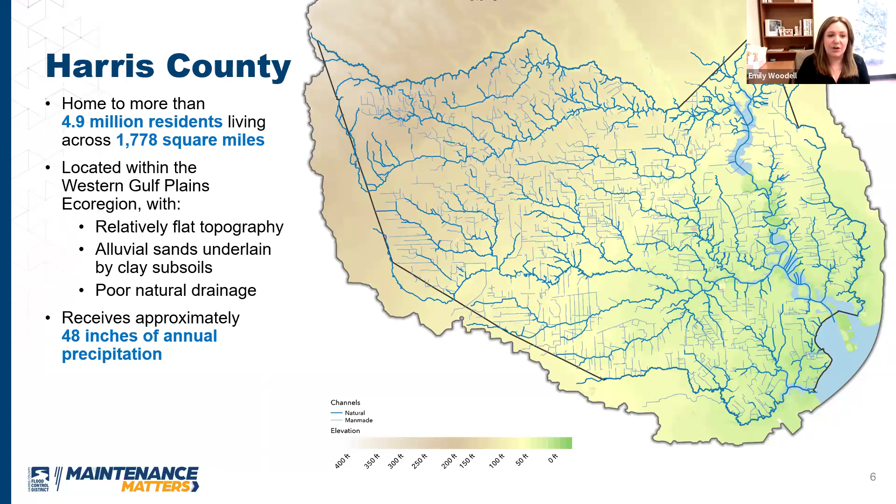Because of those issues, and in response to major flood events in the 20s and the 30s, the Harris County Flood Control District was established back in 1937. We are a special purpose district created by the Texas legislature, and Harris County Commissioners Court serves as our board of directors. We work really closely with partners at the federal, state, and local levels to advance our work across the region.

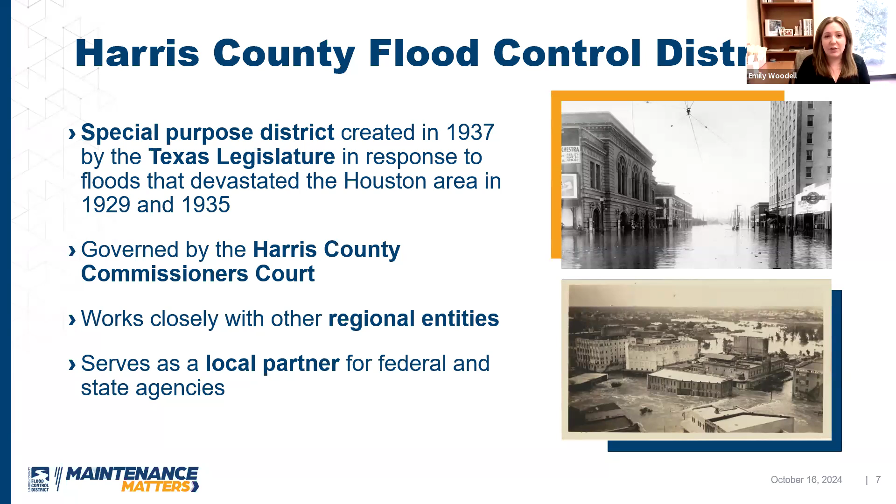Now, the Flood Control District is the only local entity with the sole focus of countywide flood risk reduction. Our mission is to plan and deliver effective flood risk reduction projects that are guided by community and natural values, all while maintaining our infrastructure.

We're unique regionally and even nationally because our scope includes both capital work, where we plan and implement projects to add capacity to our network, and maintenance, where we focus on ensuring our network is functioning as intended. There are a lot of entities that have responsibility for one or for the other, but the Flood Control District was designed to do it all, and that's really where our work sits.

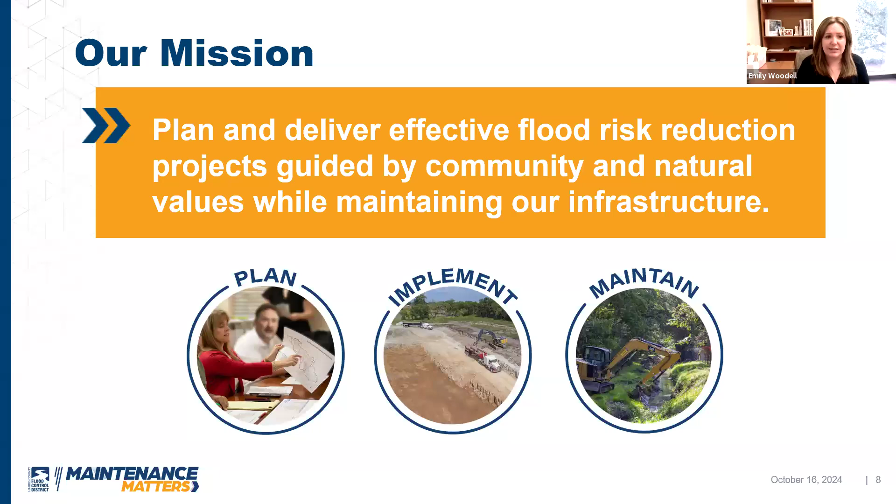We're the only entity in our region with the sole purpose of countywide flood risk reduction, but other organizations play a really important role in that overall picture. When rain falls on your roof, it flows through several jurisdictions, such as streets and drains maintained by the Harris County Engineering Department, a municipal utility district, or a city like the city of Houston, before it flows into a larger channel, creek, or bayou that the Flood Control District owns and maintains.

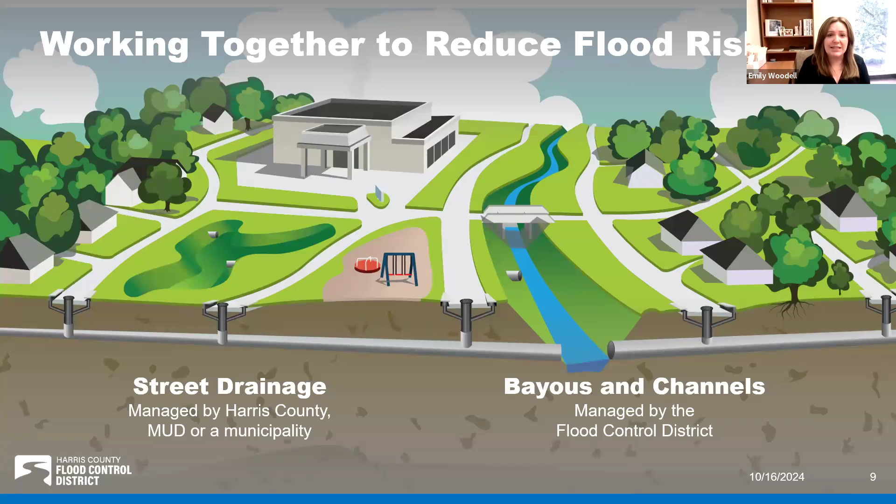Often we partner with Harris County precincts, utility districts, and other partners to add recreational amenities such as trails to our infrastructure network. That includes things along stormwater detention basins and channels.

The Flood Control District's network of flood risk reduction infrastructure spans across 23 watersheds in Harris County. We maintain about 2,500 linear miles of channels and tributaries, and that's about the distance from Los Angeles to New York, if you're looking for a driving comparison. The Flood Control District also maintains more than 280 stormwater detention basins, which are designed to store excess stormwater during heavy rain events until that water can drain safely into channels and ultimately to Galveston Bay.

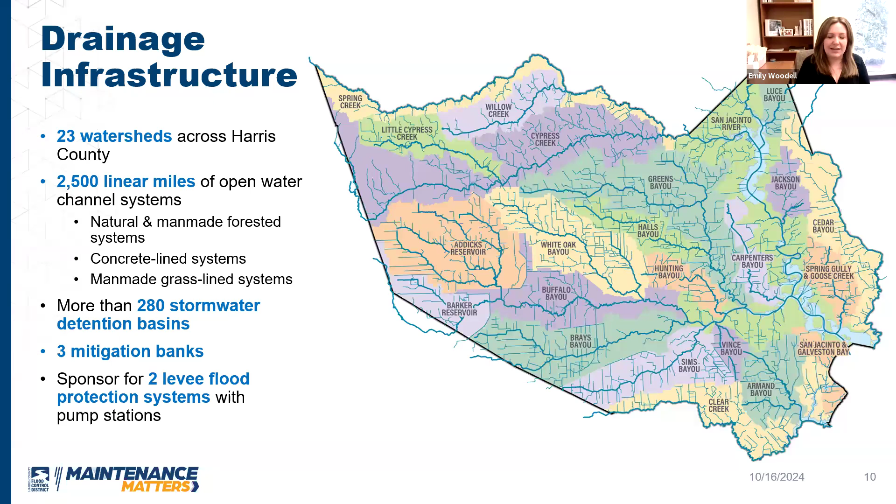Each of the different types of infrastructure in our broader portfolio requires a different type and a different level of maintenance to ensure they're working appropriately.

We do our work through a variety of funding sources. On the capital side of our organization, our largest source of funding currently is the 2018 bond program, which was overwhelmingly approved by voters back in 2018 in response to the devastation from Hurricane Harvey. That program includes $2.5 billion in local investment, and we've coupled that with $2.7 billion in partnership funding. That has generated more than $5.2 billion for flood risk reduction projects across Harris County.

In addition, our teams at the Flood Control District pursue grants and partnerships with federal, state, and local entities to fund our capital work. On the maintenance side, our work is largely funded by a dedicated ad valorem property tax. Since we're a special purpose entity, the Flood Control District has its own dedicated tax rate. This is separate from other local taxing entities and from the rest of Harris County.

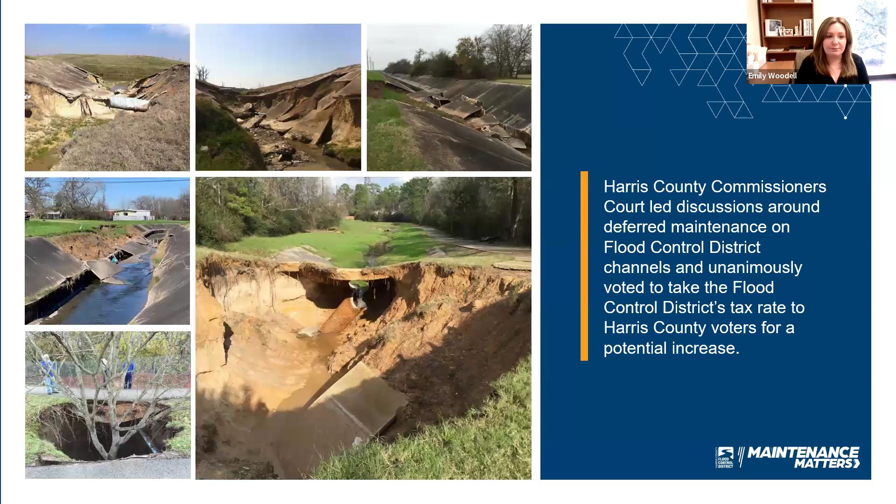In response to these conversations, this past August, Harris County Commissioners Court unanimously approved an item to take the Flood Control District's dedicated tax rate to voters to consider an increase. On the ballot, this will appear as Harris County Flood Control District Proposition A. The proposition includes language raising the Flood Control District's tax rate by 1.581 cents per $100 of valuation. Voters can select for or against on the ballot in response to the proposition.

But I want to talk a little bit more about what that potential increase would mean for Harris County residents and for the Flood Control District. Now, I mentioned that as a special purpose district, we have that dedicated tax rate. The 1.581 cent increase would amount to approximately $60 per year for the average homeowner in Harris County. On the flip side of that, this increase would generate approximately $100 million in new revenue to fund maintenance work across Flood Control District infrastructure.

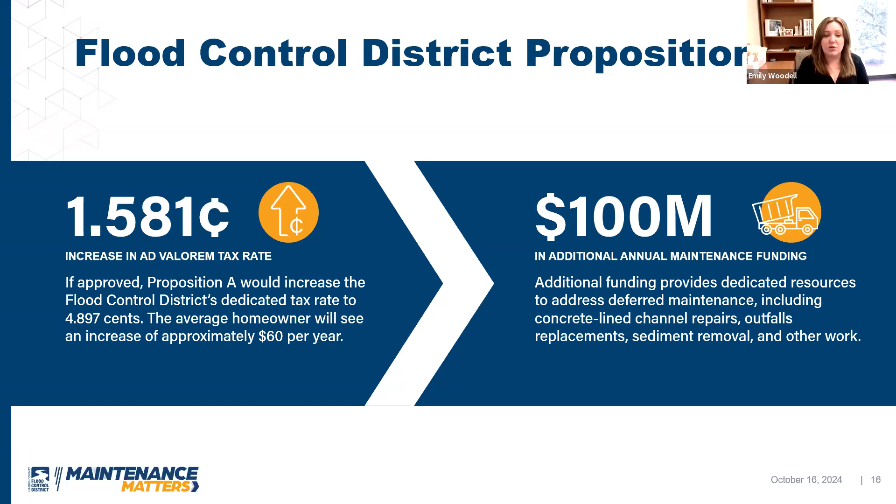Now, this work spans Harris County. The revenue generated would go into the Flood Control District's maintenance account, which is dedicated to funding maintenance work and controlled by our organization.

The Flood Control District's maintenance work falls into 4 major categories, and any potential increases in funding would follow these same buckets. Each of these categories is important to ensuring our infrastructure network is functioning as designed. Our goal is to have our channels and network in what we call an ever-ready state, meaning they're always ready for the next storm.

But instead of telling you about all of these categories myself, I want to turn it over to the experts who do this work every day. So we'll start with preventative maintenance, and I'll turn things over to Nick Griffin, our Facilities Maintenance Department Manager, who'll share some background and context on that important work. So Nick, over to you.

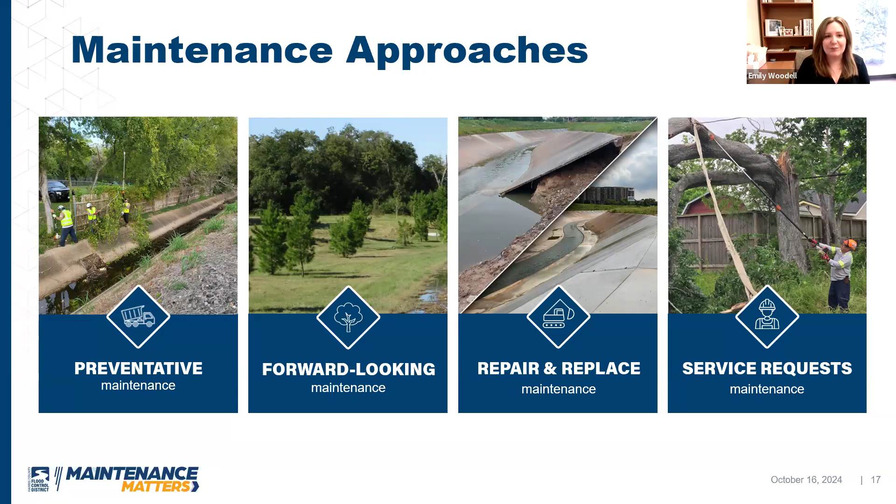Thank you, Emily. Hi, everyone. When we talk about the Flood Control District's preventative maintenance work, we're talking primarily about vegetation management, and there's a lot of work that goes into that year-round.

First, let's talk about mowing and the Flood Control District's mowing schedule. As a standard, the Flood Control District uses mowing to control invasive species and prevent trees and other tall vegetation from growing where it shouldn't. Mowing also allows us to better inspect our infrastructure for deficiencies. We mow Flood Control District property 3 times per year on a seasonal cycle.

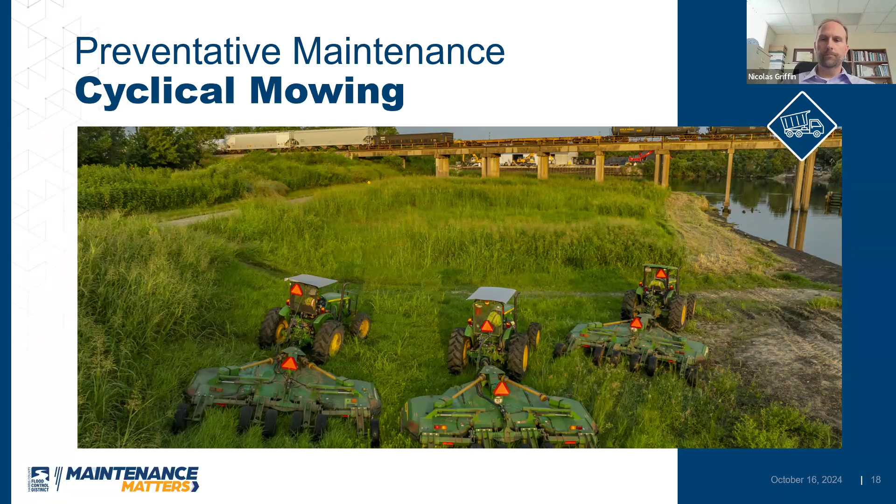One of the more recent tools in the vegetation management toolbox is selective clearing. Primarily, selective clearing is employed to maintain optimal channel conveyance capacities and also stream bed and environmental integrity within our forested channels. Some great byproducts of selective clearing are promotion of biodiversity and tree canopy growth, thus increasing shade and reducing undesirable species growth. Great care is taken to ensure the most desirable plant and tree species remain in place and native ecological areas have a chance to prosper.

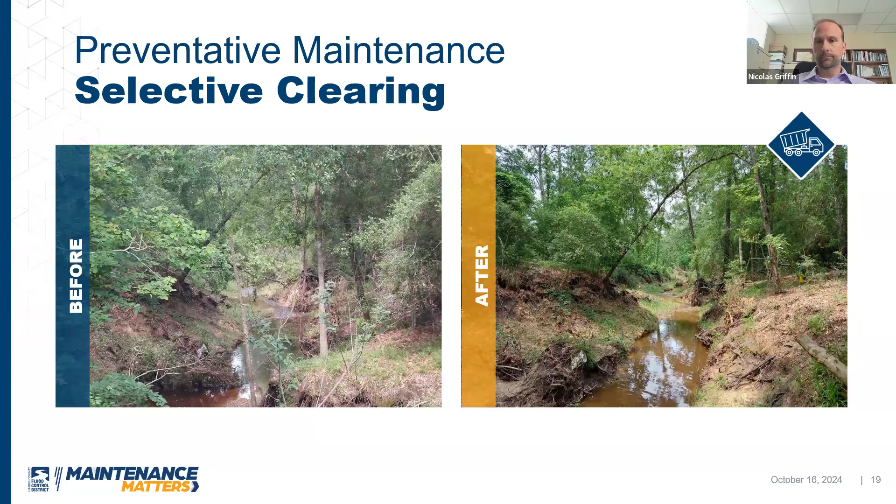Another important component of preventative maintenance is what we call invasive species management. Invasive species refers to vegetation or animal species that are not native to the area, and these species can be damaging to natural flood risk reduction properties of our channels. We manage invasive species through a variety of approaches, including targeted herbicide applications and the capture and removal of nuisance animals that damage the systems.

Let's talk about trees. My department is also charged with hazardous tree removal. I'm sure we're all familiar with the damage fallen trees can do. Fallen and hazardous trees can not only block the flow of stormwater in our channels, but they can also impede our access to those channels so that we can properly maintain them. Our teams remove dead and hazardous trees year-round, and we see an increase in this activity after severe weather events.

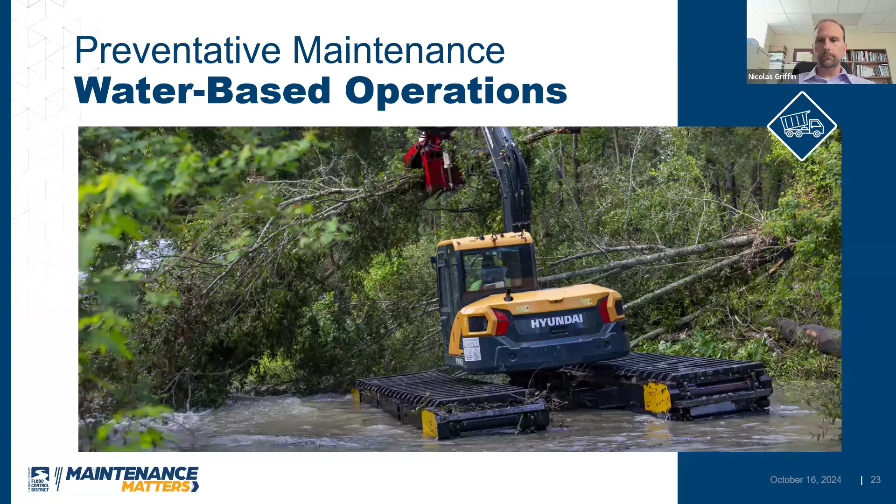The last piece of preventative maintenance I'd like to talk about is what we call fence line pruning. Again, as the name implies, this work involves vegetation management along the fence lines that border our network of channels. Keeping the fences clear of vegetation prevents this vegetation from growing into the channel and impeding the flow of stormwater, and it also allows us better access to the channel for other maintenance and inspection. We would focus this work within flood control district rights of way, and this helps ensure our channels continue to convey stormwater effectively.

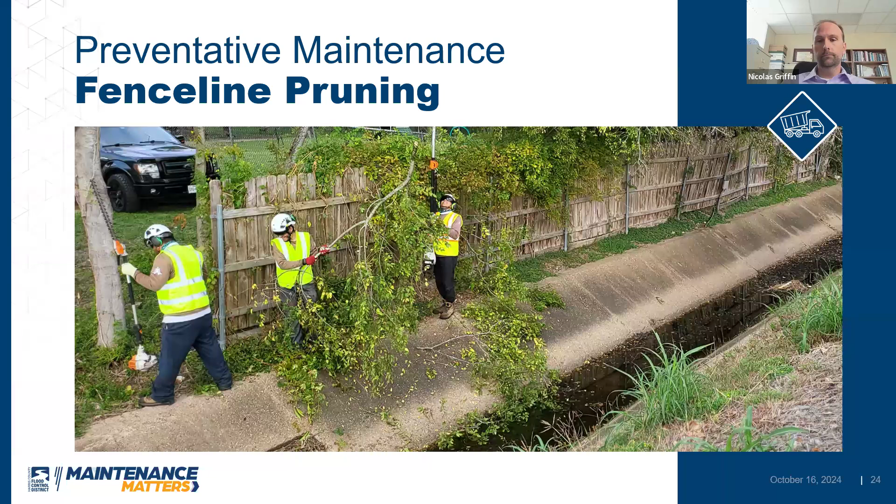These efforts not only produce environmental benefits, but also lower maintenance costs in the long term. The root systems of these native plants help reduce erosion and stormwater runoff. Thanks for letting me share some of my work with you. I'm turning it over now to my colleague, Jason Brock, Maintenance Engineering Department Manager, who will talk a bit more about his area of repair and replace maintenance.

Thanks, Nick. Yes, as Nick said, my department is responsible for what we call repair and replace maintenance. This includes the type of maintenance work that repairs and replaces failing infrastructure. These failures can include several things, including the accumulation of sediment in our channels, erosion in our channels, damaged outfall pipes, or failures to the concrete linings of our channels. Most of these failures can be attributed to aging infrastructure and deferred maintenance. Our focus is to keep our infrastructure working as it is intended. I have some before and after photos to illustrate some of our work.

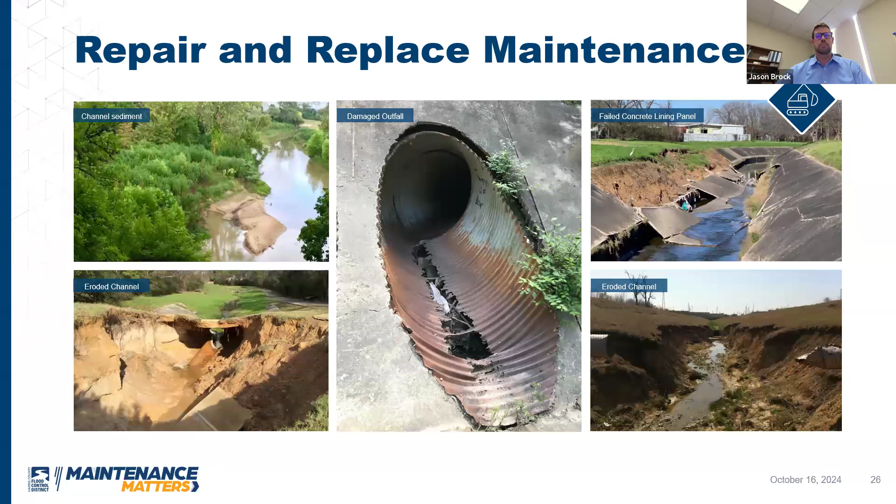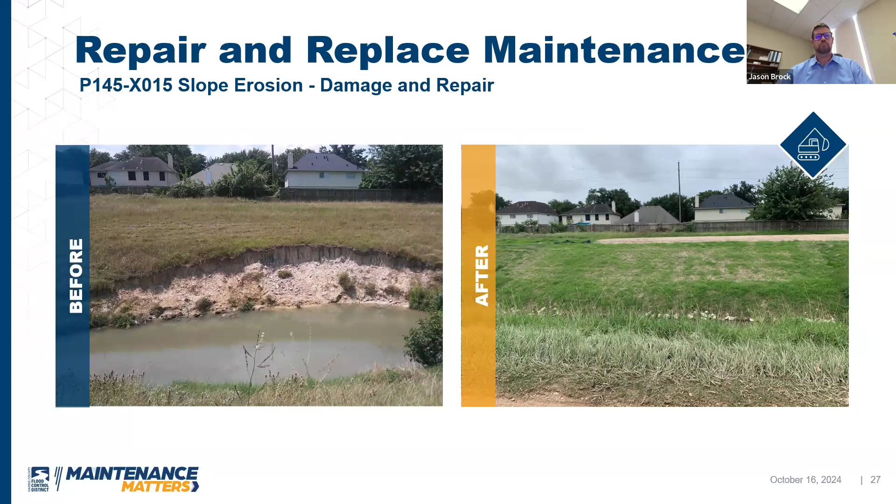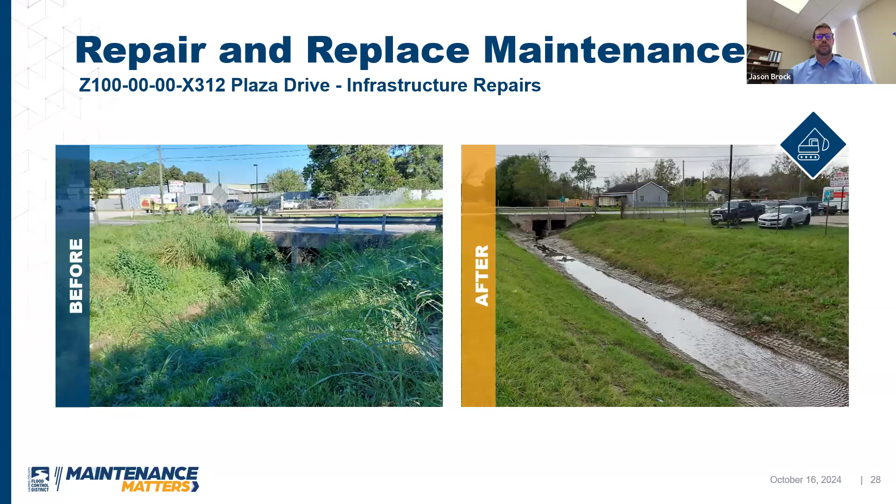I hope this has given you a good glimpse into the scope of the Flood Control District's repair and replace maintenance work. I'll turn it over now to my colleague, Jeremy Phillips, the Asset Management Division Director, to tell you about our management of citizen service requests.

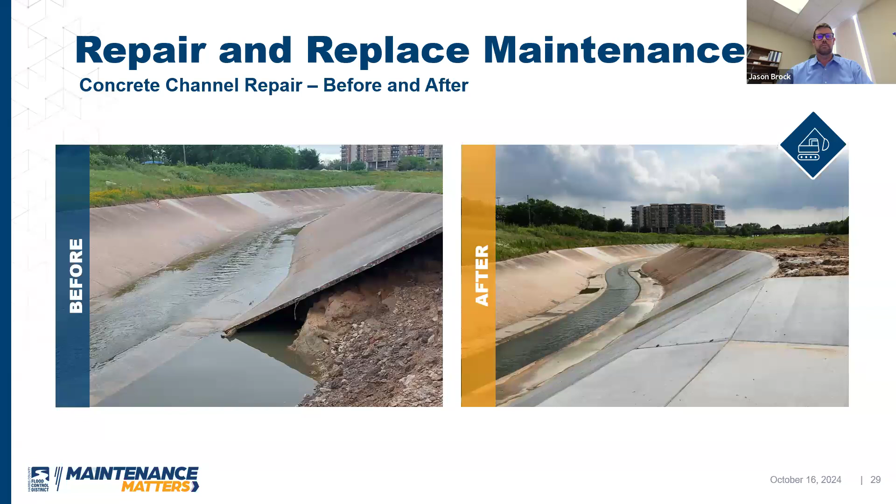Thank you, Jason. Hi, everybody. Regardless of the type of maintenance the Flood Control District performs, our crews work hard all year long to identify and prioritize where maintenance is needed. Sometimes, though, residents might see maintenance need before our crews do, and we rely on service requests from the community to help us maintain our channels and infrastructure.

We try to make it as easy as possible for residents to submit a service request. Simply go to our website at hcfcd.org/service-request or call our Citizen Service Center during our business hours by dialing 346-286-4197. When you submit a service request, you will receive an email confirmation, and our team will investigate your concern. Once we've identified the issue, we work with our maintenance staff to address it.

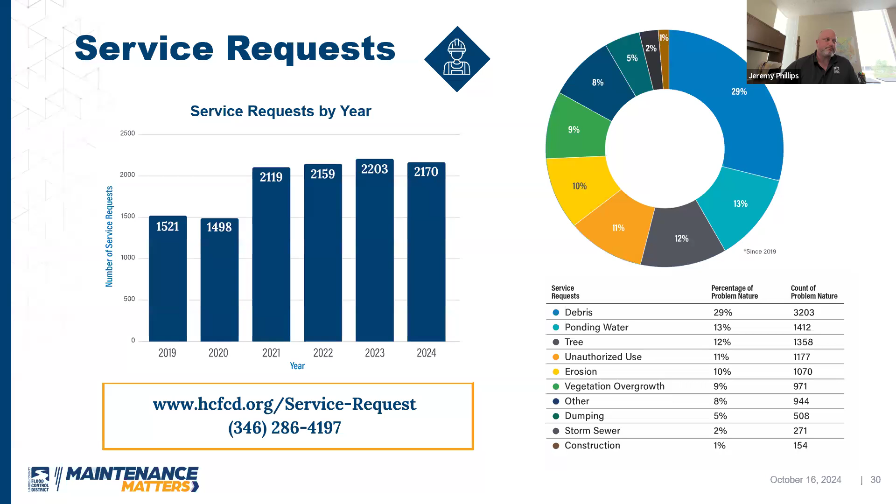I'll now turn the presentation back over to Emily. Thank you, Jeremy, and thanks, Nick and Jason, for all of that great information about your team's work across the organization. So as y'all have seen, the Flood Control District operates a large amount of drainage infrastructure that requires different types of maintenance, and these guys really lead the teams that are doing that work every day.

Any increase in maintenance funding would be invested into those categories that we've discussed today, and we can answer your questions about what that looks like. Our mission, just to kind of reiterate, is to make sure that we're planning, building, and maintaining those flood risk reduction projects and keeping our infrastructure effective and reliable as we move forward.

So as we wrap up the presentation today and start to transfer into the Q&A, I just want to go back to the impact of Proposition A for homeowners. I think that's a really important topic. So if approved by voters, just as a reminder, this proposition would increase our dedicated tax rate by 1.581 cents per $100 of property valuation. According to our friends over at the Harris County Office of Management and Budget, that's about a $60 per year increase in an overall tax bill.

Now, I also want to reiterate that our goal today is not to influence decision-making, but just to make sure that we're sharing information about our maintenance efforts and listening to you on your maintenance priorities. So I would encourage folks to utilize the chat feature, ask us questions. We're happy to clarify anything, but also to just remain engaged on this topic as we move forward. You're able to visit our website at www.hcfcd.org to submit those service requests that Jeremy was talking about, or just engage on other topics. And that really helps us with our decision making.